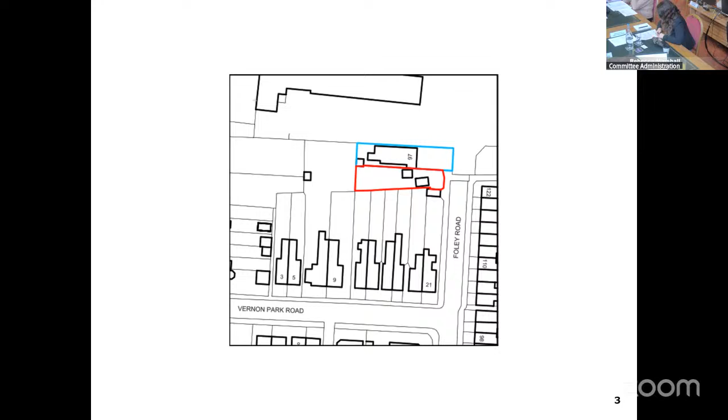In terms of the site location, the site is situated on the western side of Foley Road at the end of a cul-de-sac. The site boundary is at the end of long gardens to the rear of semi-detached properties on Vernon Park Road, and opposite a locally listed terrace on the eastern side of Foley Road. To the north of the site is the host property, the existing 97 Foley Road, and the proposed property would become 97A Foley Road. To the north of 97 Foley Road is Christopher Whitehead School, Sixth Form College, and associated car park. The site is not within a conservation area and does not contain any statutory listed buildings.

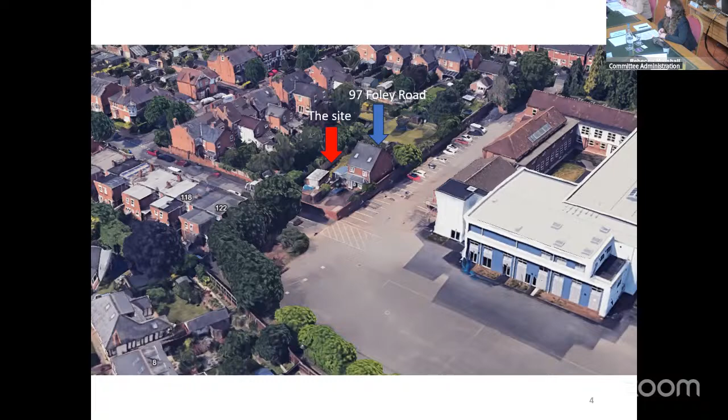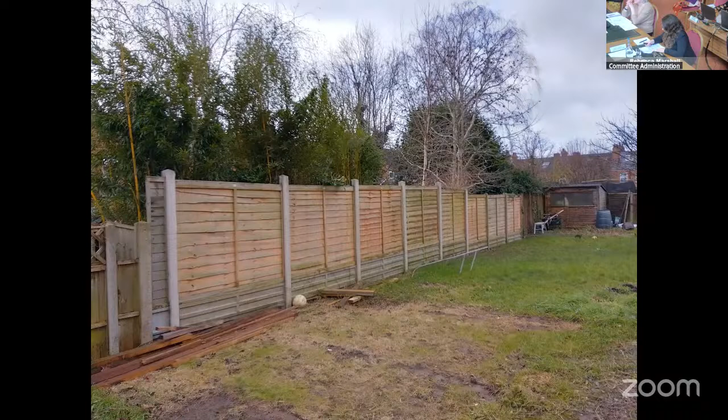It should be noted that planning permission has already been granted for a dwelling in this location. Whilst the design is changing, the scale and height remain very similar to that approved. The current slide shows the pre-existing site plan and the approved site plan as approved under the previous planning permission, reference 21/00624/FUL.

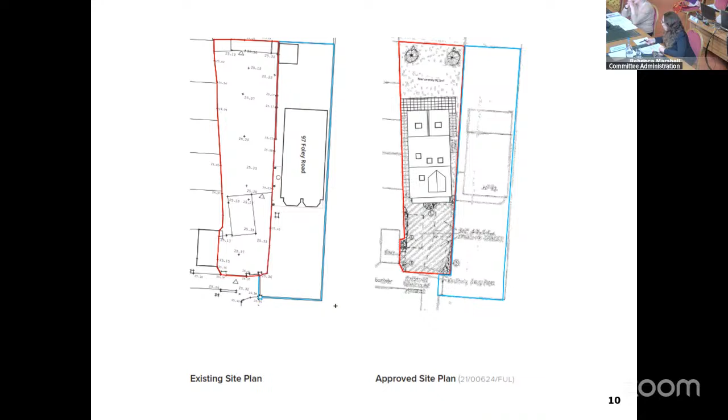The next slide shows a comparison between the approved site plan and the proposed site plan. As you can see, the footprint of the building is moving slightly and will be further away from the boundary with gardens on Vernon Park Road. It will be parallel to the existing house at 97 Foley Road.

The length of the property is extended slightly, but not significantly. The proposed property will still have 3 bedrooms and 3 parking spaces to the front, and there are no changes to the approved parking arrangement. Cycle parking for 3 bicycles is to the front within a secure cycle store, and bin provision store is located down the side of the property.

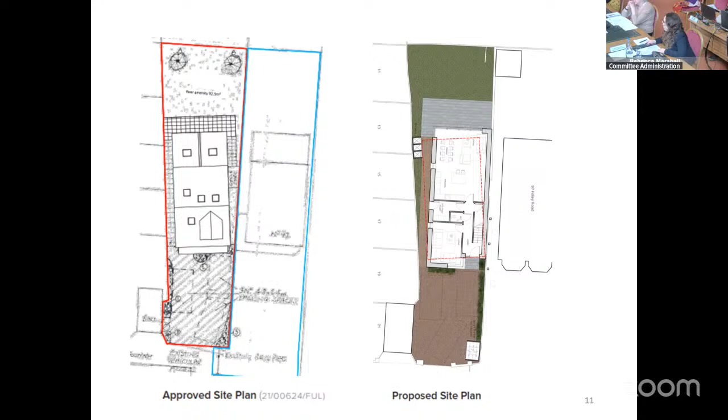Given the angle and separation distances, there's not considered to be any significant adverse impact, especially when the nearest property is 22 metres away. So overall, we don't believe there's going to be any increased overlooking or loss of privacy.

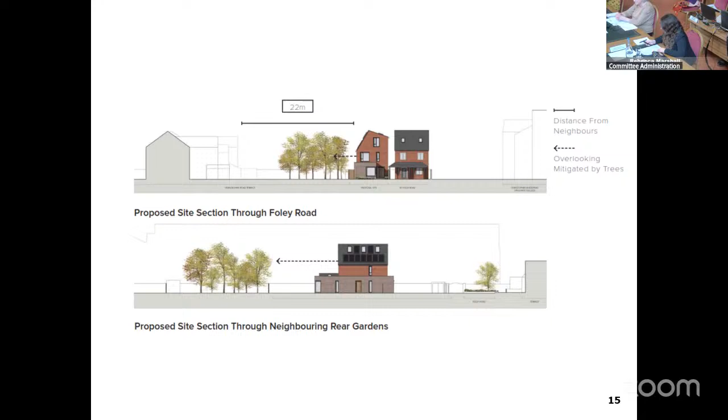This slide shows the revised proposed site plan. The dashed red line denotes the footprint of the approved house, overlaid on the footprint of that which is now proposed. This slide also shows the proposed hard and soft landscaping and the bin store and bike store, as well as the layout of the cars, which is unchanged from the previous permission.

The next slide shows the proposed elevations from all sides. The north side elevation, which is a sheer brick wall, is adjacent to the existing house at 97 Foley Road and will not be visible in the surroundings.

The material palette is also noted on this slide, being predominantly constructed in red brick to match the existing house at 97 Foley Road, with elements of grey brick at ground floor level, protruding brick features to the front, dark grey slate to the roof, high quality windows and PV panels to the roof. A biodiverse green roof is also proposed to the roof of the ground floor single-storey element to the rear.

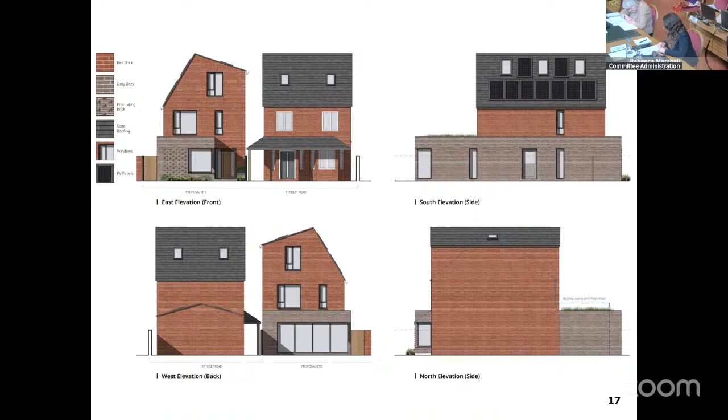So the key issues to consider in the determination of the application are the acceptability of the proposals having regard to the principle of development, impact on neighbouring amenity, design and heritage, energy and highways matters.

In terms of the principle of development, this application is made under Section 73 of the Town and Country Planning Act 1990. This allows conditions associated with a planning permission to be varied or removed.

A function of Section 73 applications is to seek a change where there is a relevant condition that can be varied. So, as set out in the committee report, there is no statutory definition as to the extent of the change, as set out in the PPG, and there's no statutory limit on the degree of change permissible to conditions under Section 73, but the change must relate to conditions and not to the operative part of the permission.

The approach that should be taken to Section 73 applications is not to reassess the merits of the approved development, but to instead consider the merits of the condition or conditions that are proposed to be varied. So where an application under Section 73 is granted, the effect is the issuing of a new planning permission sitting alongside the original permission, which remains intact and unaltered.

So this proposal seeks to vary condition 2, which is the approved plans of the previously granted planning permission, to amend the design and create a passive house.

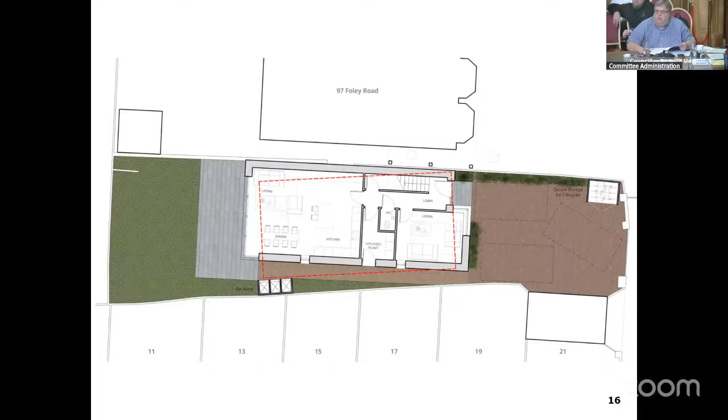That's the one, I think. No, it's not it. No. Yeah, that one, yeah.

I'm a bit on the horns of a dilemma here, Chair, because I actually do find the design of the new building attractive. I do like what it says and what goes with it, but then again, I don't have to live my life looking at it every morning. It's a considerable change from what's previously been given planning consent, and that does concern me. I think that's one of the major objections of local residents, the visual amenity of the site. Bearing in mind the majority of Foley, well, in fact all of Foley Road, is of a particular type of housing which the previous application would not necessarily have been in compliance with, but similar to.

This will stick out like a sore thumb in an area with locally listed buildings, and that is a concern to me. I do wonder whether there is anything we can do about the grey brick, because I think that makes the house look a little bit problematic. I also wonder whether there's anything we can do about the delivery of goods vehicles to this site, bearing in mind the next door neighbour is a school and the area is heavily populated during school times with parents dropping off and picking up children. I wonder whether deliveries could be restricted to outside school times. I'm not convinced, even though I personally like the design, that it's in keeping with local expectations, and I wonder how we can justify saying it's in keeping with the local character, because quite frankly it isn't.

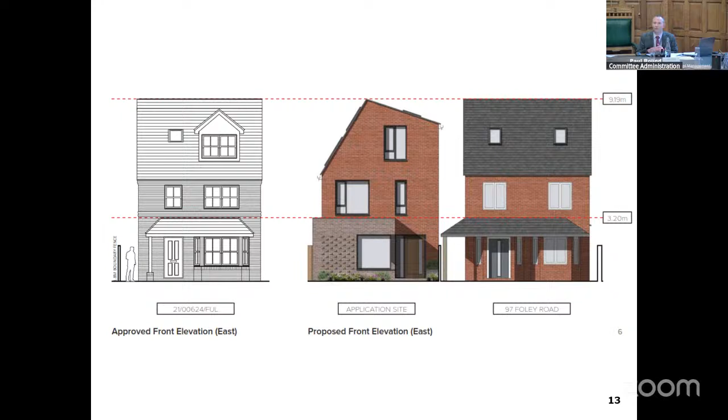But obviously that's your view, Councillor Udall. I don't know how the rest of the committee are viewing the rest of the brickwork. I did ask the applicant about the brick, and it's purely for cosmetic purposes. Otherwise I wouldn't have made the suggestion, because I do think it will have an impact on local residents.

Councillor Udall, I'm very much of the opinion that for brickwork, samples are what's important. You can show a brick on a drawing which turns up physically rubbish, and also it's the mortar as well, the mortar colour and how it's done. So I'm wondering whether we just make sure the material samples are done properly, but maybe you get a sample panel if you're that worried about it, so we can see the different bricks and mortar together. Would that be like a 1 metre square panel or something? Because then the officers will have the confidence to know it's going to look good.

Because there's grey brick and there's grey brick and there's grey brick, but I think you've got to consider these are professional architects who've done a very long degree to know what they're doing. And you've got to let the client have a bit of choice over how they're spending their money, don't you, as well, Chair, I'd say.

Totally agree, and I think a sample panel is probably the way forward. I agree in essence with what you're saying, but beauty is in the eye of the beholder. I do have a bit of concern about the grey brick and the separation between grey and red. I would personally prefer, and residents have indicated they would personally prefer, just a complete red brick building. I believe that would be in keeping with local expectations and local visual amenity.

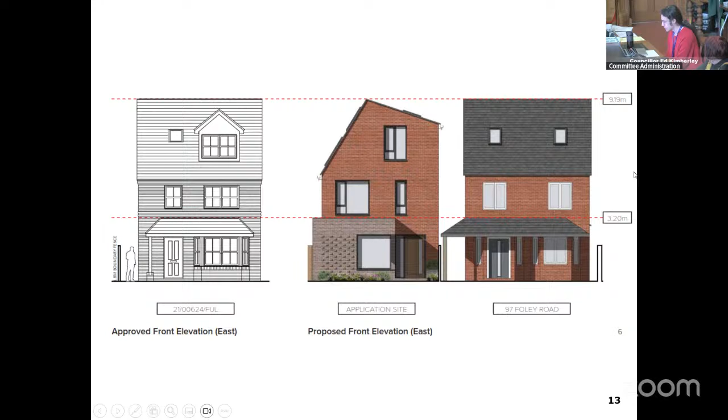I think there is one first floor window overlooking the other gardens, and it is opaque as I understand it. I am not an especially tall gentleman - I'm not going to stand up and prove that, but I am not an especially tall gentleman. I find it difficult to imagine that if there are three ground floor windows, those will effectively be overlooking the garden through what appears to be quite a high fence from the pictures I've seen.

I also think it's reasonable to imagine that if this was a proposal to tear down one of the terraced houses on Vernon Park Road and replace it with this building, we'd all be gathering around to say no, no, no, no, no, this is not a good idea. Again, I know we don't do speculation, but I'm just going to take the license to speculate.

We're not talking about the construction of a new Victorian house, because we don't generally build new Victorian houses, and there's a few practical reasons why we don't do that. One of them is that sustainability is a practical concern. It is not just a left-wing buzzword, it is actually something that matters. If you're trying to run or heat a property built in the Victorian or Georgian period, anybody who has the fortune of living in such a property, while they may have a wonderful view from the street side...

...it is a difficult thing to run. It is costly, the pipework constantly needs cleaning and maintenance. There are so many practical problems with it. This will be a development that requires a minimum amount of maintenance and is actually exceedingly practical, providing housing stock into the longer term.

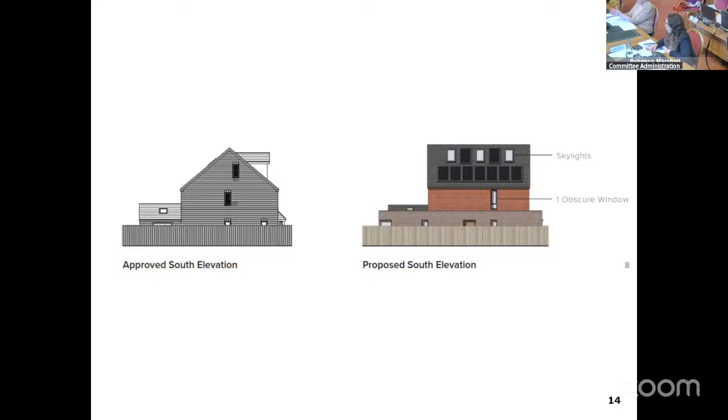Looking at the first floor, you've got red brick with an obscure glazed window, and then looking at the ground floor, you can't see over that fence, and there are obviously trees along the backs of gardens and vegetation which also obscure that view. You've also got to note that it is 22 metres between the closest rear return and that property. So taking all of those things into account, I think the design is actually very good in architectural terms. Can we get the 3D view up instead of that?

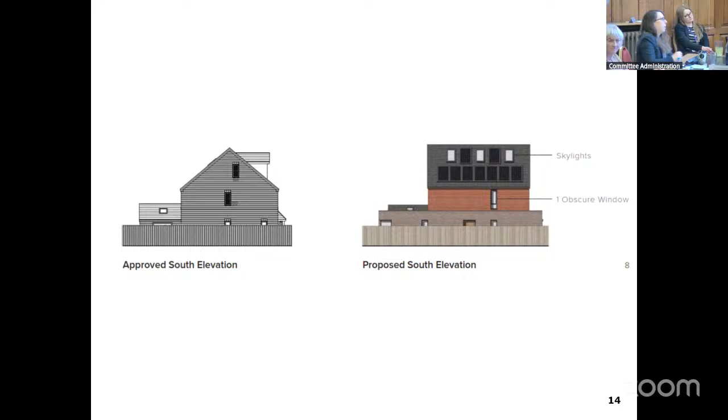Is that right? Because I think that helps show the slope a bit more. Let's remind members of the slope. So it is - well, you made the point about massing earlier, didn't you? And the change of that elevation with the slope of the roof - that's definitely, I think, impacting the massing from the view of the neighbours.

I'm heartened to hear that they're using slate. Slate's really expensive, so, you know, but it's obviously an excellent material choice and looks really good with red brick. So, you know, quite happy with that myself.

And Mr. Round is of that view as well, Chair. I don't know.

Through you, Chair - when looking at the two, I believe that the design components work together and it provides an acceptable approach under the policy. That's the way we work, isn't it? We work through the policy, we look at what the design guide tells us to go through, and there are some components in here which I think are good design, and actually in the comparison of those two side elevations, I believe that the proposed one is a better situation in design terms, both in terms of the impact on the Vernon Road properties, because it removes the massing, it moves the property further away, and actually provides them with a better outlook. So from a design point of view, I do believe that it's a better solution.

Okay, it's a site visit to Specsavers then, Chair.

I suppose one thing I want to mention really is that the thing about Passive House is that it's really, I think, form following function particularly. It has to work, the windows have to work, you have to let enough solar gain in. I hope that there's enough windows on the east and west elevations to do that. But it really is about the massing - that's really important in Passive House as well. So, yeah, have we got any other comments, please?

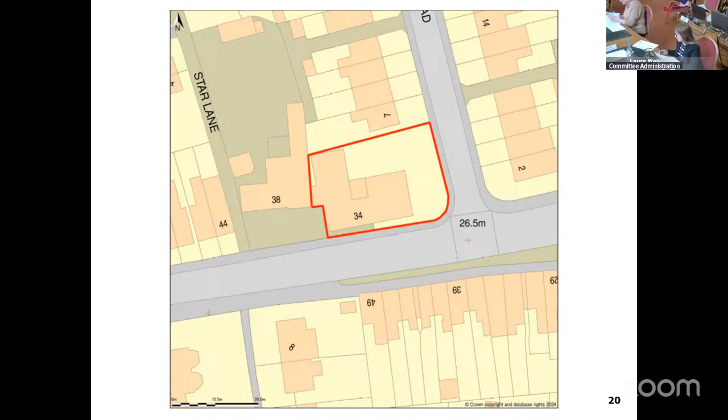Now looking at the site's location, indicated by the red line on the location plan here. The application site comprises number 32 to number 36 Bransford Road in Worcester, situated at the junction of Bransford Road and Graham Road. As Bransford Road continues to the east, there is a Catholic church and a primary school leading on to the St John's Local Centre.

The site is a sustainable location with good connectivity, with nearby access to public transport links, with bus stops on either side of the road outside the front of the property. The application site is located within a primarily residential area.

Bransford Road serves as a key local route which is lined with a mix of terraced and semi-detached dwellings. There's also an existing Cantonese restaurant, number 38, adjacent to the existing convenience store within number 36.

So 36 Bransford Road, an existing convenience store with a 2-bedroom residential flat above. Number 34, however, an existing HMO, use class C4. There are also 3 flats within number 32 Bransford Road.

The existing HMO is a total of 5 bedrooms, and the flat affected by the proposals has 2 bedrooms. The proposals do not seek to add any additional bedrooms to either the HMO or the flat at the site.

Now looking at the existing floor plans, with 1 HMO bedroom at ground floor, along with a lounge, kitchen and downstairs WC. At first floor level, there are 4 bedrooms within the HMO and a bathroom. Within the existing flat, there are 2 bedrooms at first floor level and a combined lounge and kitchen.

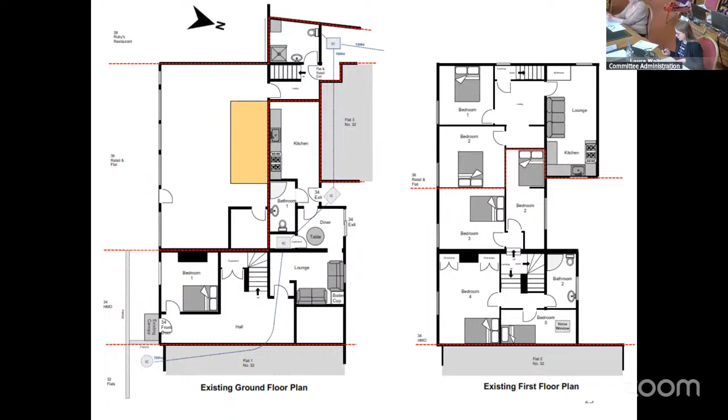Now the proposed floor plans. The existing retail area is proposed to be converted into an extended lounge, kitchen and dining room for the use of the occupants of the HMO. And within the flat, the change relates to the creation of a new entrance hallway, accessed from the front elevation.

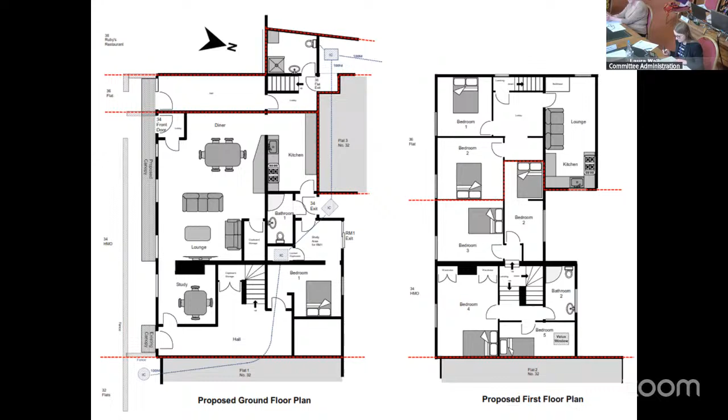Now moving on to the existing and proposed elevations. The proposals include the removal of the existing shop front and the introduction of doors and windows similar to the existing ones adjacent. There is also a tiled canopy introduced to the frontage. The proposals also include a 3-foot wooden fence similar to the existing fencing, albeit not as high.

Whilst it is considered that the design is appropriate, it's recognised that the application site is at capacity in terms of development overall, and that the previous planning permission at the site included a condition removing permitted development rights. It's therefore considered reasonable and necessary to carry forward this condition to the new application, as set out in section 9 of the officer's report.

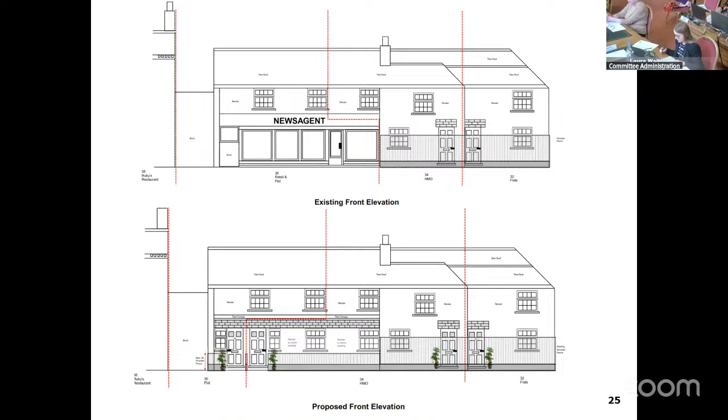Looking at the outside areas, including the amenity space, parking, refuse storage, vehicular and pedestrian accesses, these amenity areas remain as existing, and the proposals result in no further new demand for parking. Now the plot plan just showing the existing arrangement here.

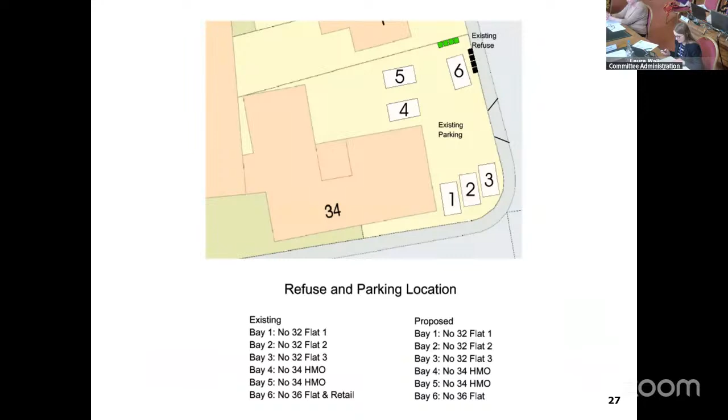During the course of the application, a number of objections have been received in relation to the loss of the retail shop as a community facility and the impact on the loss of the shop on elderly and disabled local residents.

With regards to the acceptability of the principle of development, the considerations of SWDP 10 are particularly relevant here. This states that the change of use of a neighbourhood or corner shop will only be permitted if there is an alternative equivalent facility within safe walking distance. The footnote to the policy clarifies that 800 metres is considered to be walking distance.

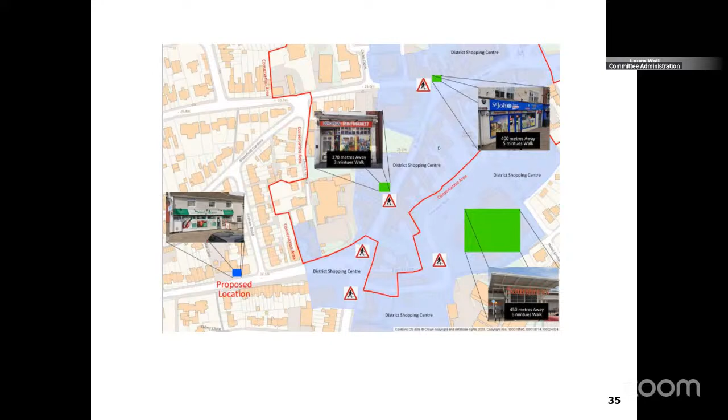Whilst the community concern with regards to the loss of the community asset and the impact on local economy is noted, as there are equivalent facilities within safe walking distance of the site, the requirements of Policy 10 are met and there is no conflict with this development.

Whilst it's considered that the shop would be missed by the local community, it is also a consideration for members to note that as the shop falls under Use Class E, following the changes to the Use Class Order in 2020, it is possible to change the use of a shop to a C3 dwelling house or any use falling under Use Class E under permitted development without the need to apply for planning permission.

Concerns with regards to the over-concentration of HMO properties and the impact on parking and highway safety have also been raised, and as the proposals add no new residential flat rooms or new HMO rooms or uses at the site, the proposals would not further impact on the over-concentration of HMOs in the area.

Similarly with parking, as the proposal would see the removal of the shop, which would generally be expected to generate higher vehicle movement and the need for further parking, the proposals themselves are likely to improve the parking situation within the area. It is also considered that the proposals would improve the living conditions within the existing HMO through providing a larger communal area, which is a benefit.

Therefore, taking into account all the relevant issues as set out in the Officer report, it is considered that the proposals do comply with the relevant policies set out within the SWDP and the aims and objectives of the National Planning Policy Framework. As such, the recommendation is one of approval from officers, subject to the conditions set out in section 9 of this report and the conditions relating to landscaping and the number of HMO rooms mentioned at the start of my presentation. Thank you, Chair.

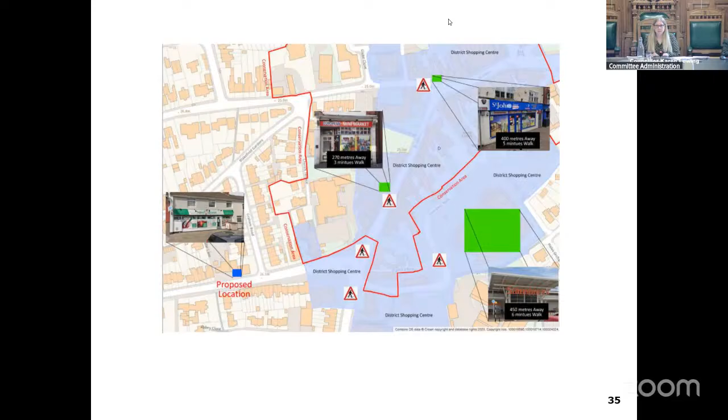I think, to be honest, the planning officer said pretty much what I was going to say. It's pretty much in the report anyway, but I'll just go through a few points which I want to clarify. I believe we're here today because County Councillor Udall has picked it up and stated there are concerns with a loss of retail space, parking, and a community loss.

We accept what he says, but what we've been advised is technically slightly incorrect. It's not actually a loss of retail space. Since 2020, as the planning officer has stated, this unit falls under what is classed as Class E. So it has consent under permitted development to trade as pretty much anything. It could open as a vape shop, a barber's, an accountant's office - a whole broad range of different types of businesses it could open as.

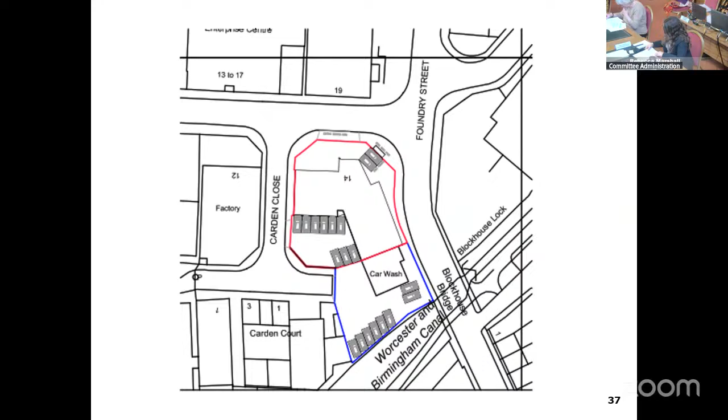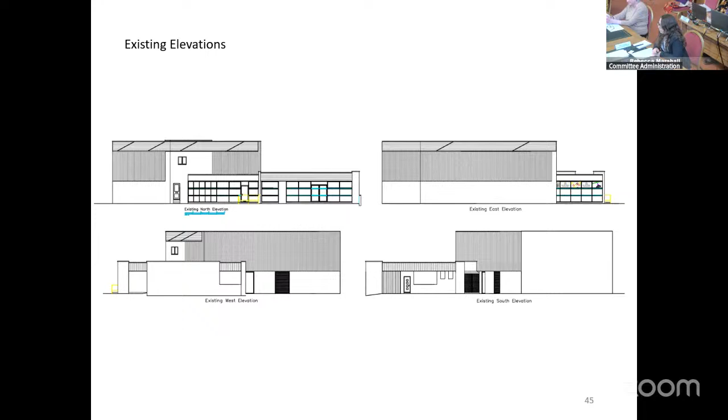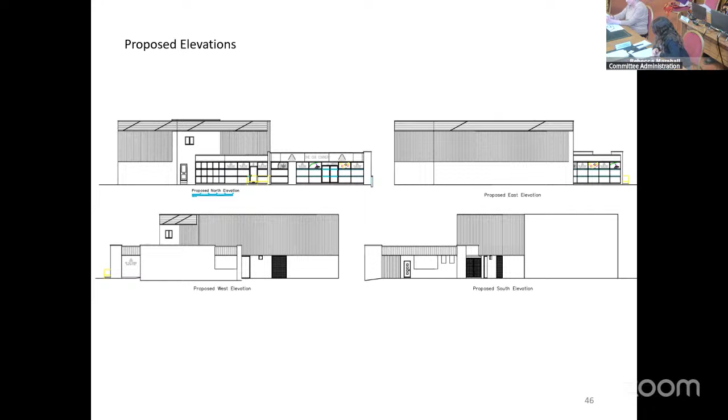This slide shows the proposed site location plan and block plan and the proposed ground floor plan. The internal areas are clearly marked out with snooker and pool tables, a darts area, a kitchen, the toilets, including a disabled toilet, and the small ancillary bar and restaurant area.

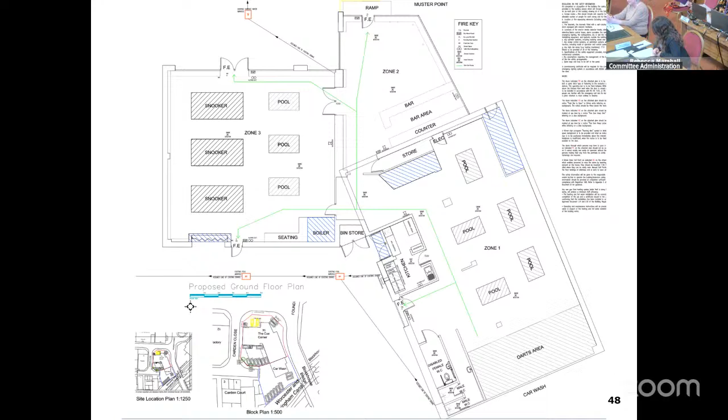As shown on this slide, 8 car parking spaces are proposed to the rear of the site within the red line for customers, along with 2 disabled spaces to the front and 2 existing staff car parking spaces. There is also dedicated cycle storage proposed to the front and a Beryl bike station immediately next to the site on the corner. In addition, you'll note the car wash site to the south, which is within the blue line of the application.

Informally, it's my understanding that the Cue Corner have agreed that their customers can park there after 5, I think it's weekdays and weekends. So there's an informal arrangement there as well. But it should also be noted that there is on-street parking in the vicinity and quite a number of public car parks.

The cycle storage is also shown adjacent to the disabled spaces to the front of the site. An image of the proposed type of cycle storage is shown on this slide, which is covered and has Sheffield stands.

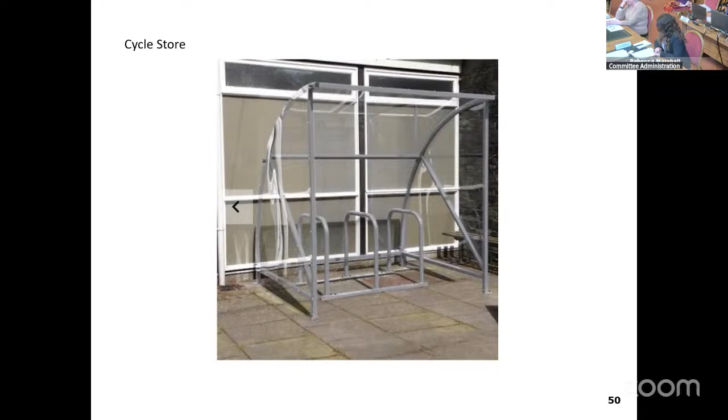So the site is located within the Blockhouse Carden Street Opportunity Zone under policy SWDP 44/5 of the South Worcestershire Development Plan. This promotes redevelopment for a mix of uses, including residential, leisure and other suitable uses. Where single uses are proposed, the policy states in Part D that applications will be evaluated for their contribution and effect on the overall mix of uses in the area.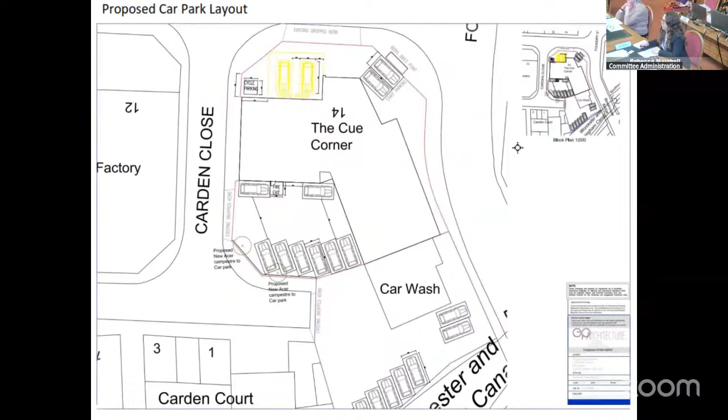The external changes to the building predominantly include replacement signage, with a separate advertisement consent application which has been submitted and is being considered alongside the change of use application. Policy SWDP 21B highlights that consent will be granted for outdoor advertisements, provided the display will not adversely affect the amenities of the area or impact on public safety. This reflects the statutory requirements under the Advertisement Regulations 2007.

In terms of impact on amenity, the replacement signage is predominantly in locations where signage previously existed, and no illumination is proposed. There will be no unacceptable impact on neighbouring amenity because of the updated signage. The proposal therefore accords with the development plan with regard to design and amenity considerations.

It is also considered that the proposed change of use will not have any unacceptable impact on neighbouring amenity. The closest residential properties on Lock Street are approximately 40 metres to the southeast from the application site, on the opposite side of the Worcester and Birmingham Canal. These are considered to be sufficiently well removed from the site that any associated comings and goings will not cause them any significant disturbance.

The snooker and pool hall with ancillary bar, restaurant and darts is proposed to open between the hours of 11 a.m. to 11:30 p.m. Monday to Friday, Saturday between 10 and midnight, and on Sunday and bank holidays between 11 a.m. and 10 p.m. A noise management plan has been submitted with the application which outlines the measures the venue will take to minimise noise and other disturbances and how they will respond to any complaints effectively.

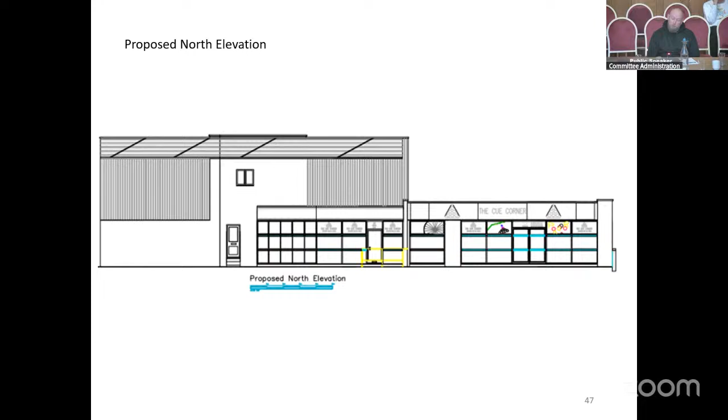Good afternoon, councillors. Thank you for the opportunity to speak today. It's going to be a lot for me to try and cram in within the 5 minutes, so I'll do my best. Since the demise of Riley's 5 years ago, there's been a huge decline in the snooker leagues and pool leagues, running down by half in the snooker.

I think the youngest participant in the snooker league at the moment is 32, which has had a knock-on effect on the growth of both sports within the city. Riley's boasted an England international female we're looking to sponsor, and another Ultimate Pool Pro. They're now in their mid-20s since Riley's shut, and there's no new generation coming through due to lack of opportunity in the area. The nearest place to go and play darts for juniors is Halesowen, so we're looking to bring the Junior Darts Corporation to the Cue Corner, which we're already in discussions with. We'll be doing Saturday weekend snooker schools through governing bodies with the WST.

I'm an avid pool player for the last 25 years, so just looking to bring something back to Worcester that's been missing for quite some time. A lot of people now have to travel to Kidderminster — there are 3 areas there where you can go and play pool or snooker, which is obviously ideal for younger people to get involved with cue sports. With the missing youth club in Worcester now, that's certainly had a bit of an impact on opportunities in this area.